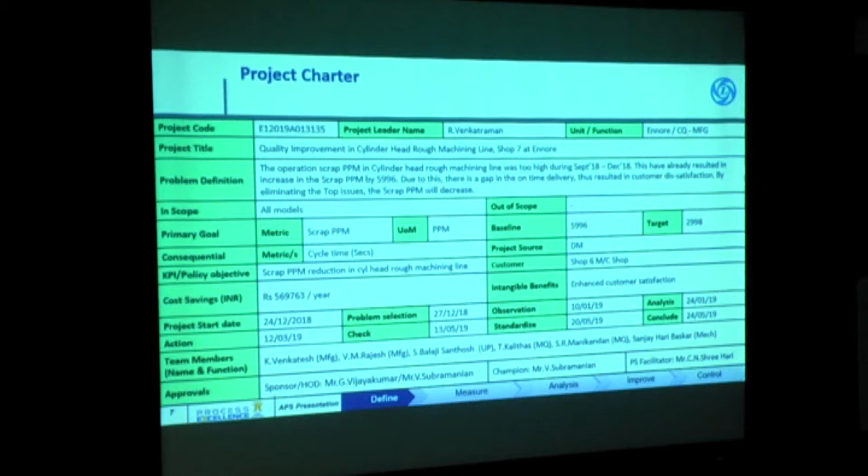So, why this project? During the last financial year, we faced a lot of issues with respect to customer complaints and scrap in the cylinder rough machining line. We got a PPM of around 6,000. This affected our company's vision in terms of delivery. So we needed to reduce the PPM by half, so we took this project.

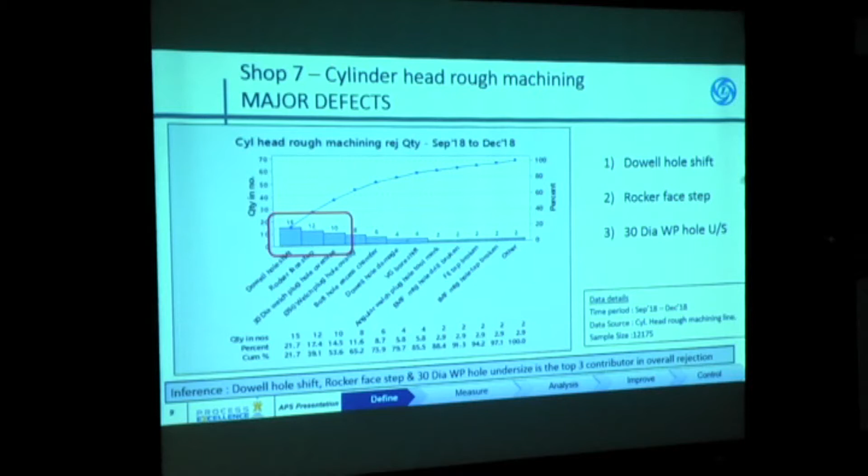In the top three concerns, the first one is dowel hole shift. What is a dowel hole? The dowel hole is used for locating and reference purposes for all machines in the entire machining line. If there is any positional shift in the dowel hole, it will affect all operations in the entire line and lead to bulk rejection at the final stage.

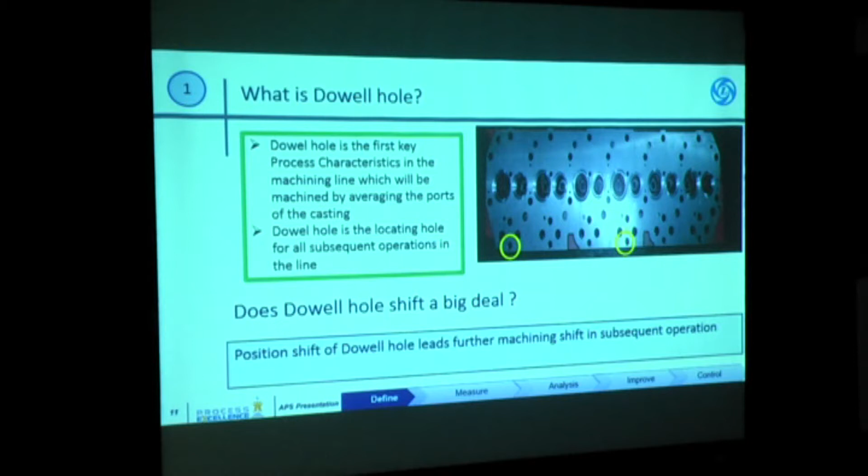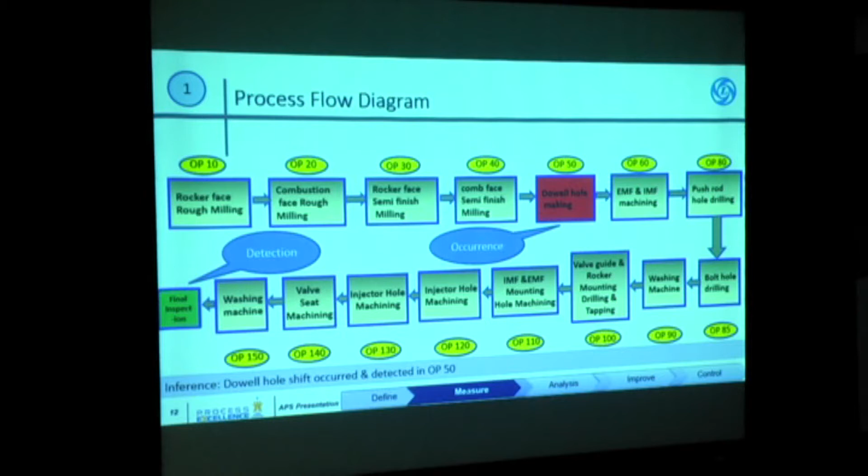This is our process flow diagram. We are doing the dowel hole making process in operation 50. If there are any issues, they are detected only at the final stage when we are looking at other operations. So this is the major concern: before we detect the issue, it always leads to bulk rejection. By fishbone diagram, we identified 7 potential causes and we are validating the same.

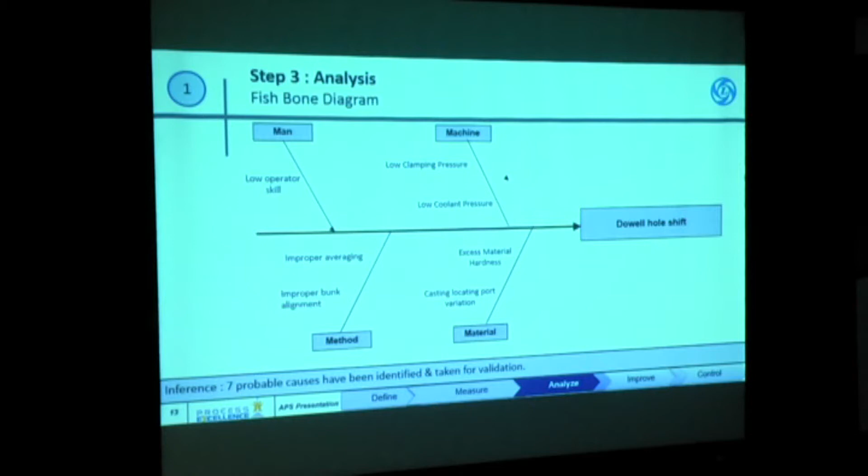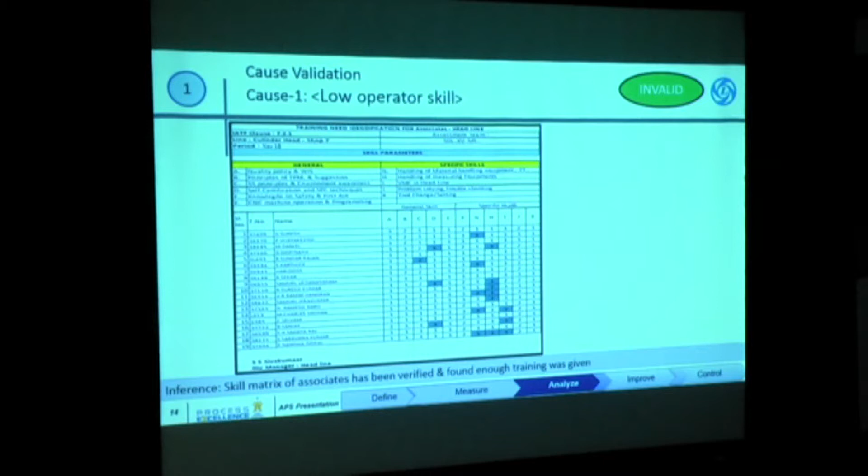Operator skill: when we went to the line, all employees working in the line are well trained and aware of the process, and they are doing their work as per the SOP, so there is no issue. Then we checked the clamping pressure, which may affect the position of the component and lead to positional shift. We took 15 samples and it is as per the spec of 40 bar. Then coolant pressure: we took the same 15 samples and it is as per the control plan, 5 bar.

Then we went to the hardness test of the input component. We checked from various lots and found the values within the spec of 190 to 230 BHN, okay, no issue. Then the locating port distance variation in the casting port, because for the drilling operation the machine takes the first, last and middle port for reference. So if there is any distance variation, it will lead to a positional error.

Then improper averaging. What is averaging? Averaging is the locating and aligning of the component inside the machine. After the dowel hole drilling, all machines take the dowel hole as a reference point, but during the dowel hole drilling, the component orientation is ensured by arresting the component in the X and Y axis by locating the conical port inside the casting port. This is called averaging.

In this averaging, we noticed an issue where the conical port is butting with the combustion face instead of locating inside the port. The machine could not identify whether the averaging is done or not. So it automatically starts the machining, which leads to improper orientation inside the machine and to double hole shift. Of these 7 causes identified, this one is the potential cause.

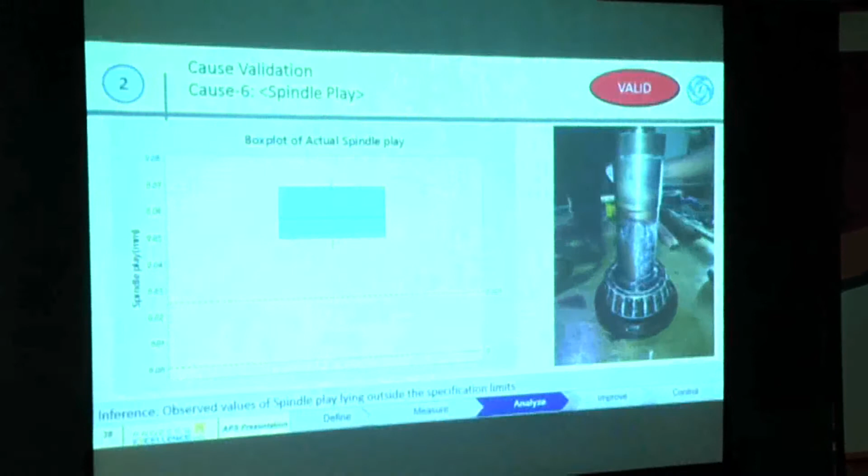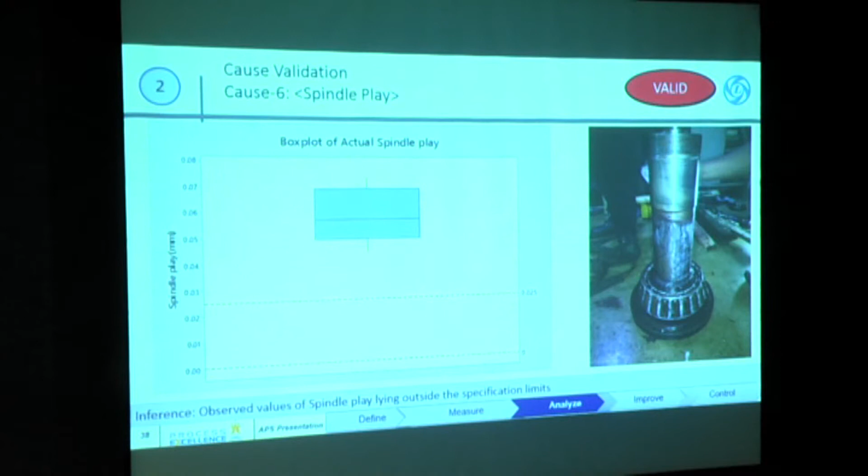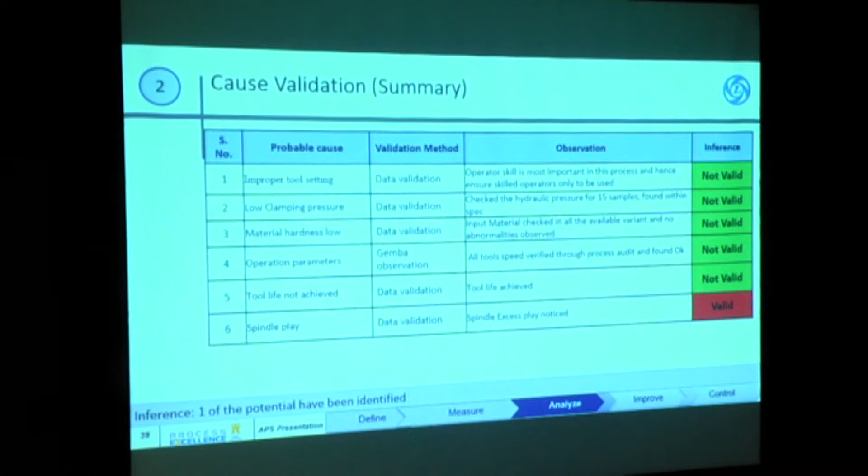Then we came to know while observing that there is a play in the spindle while analyzing the runout of the cutter. The specification has to be within 0 to 25 microns, but it was varying from 50 to 70 microns. So that is how we came to know about the root cause. So we are working on the spindle play.

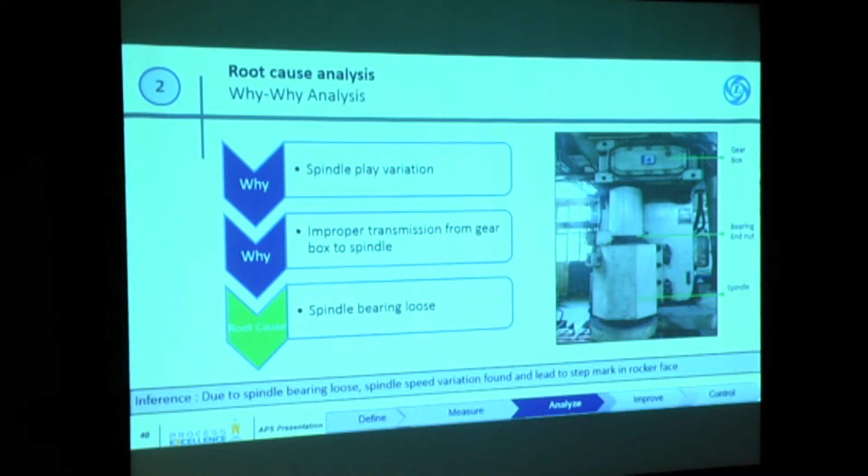So why did that spindle play happen? There is an improper transmission from the gearbox to the spindle. Then we found that there is a spindle bearing loose. We are using a taper roller bearing. It is getting loosened when there is a high load. So we have got some ideas to look into it. What usually used to happen is they would change the taper roller bearing once in 6 to 7 months. So it was actually highly time consuming and cost consuming.

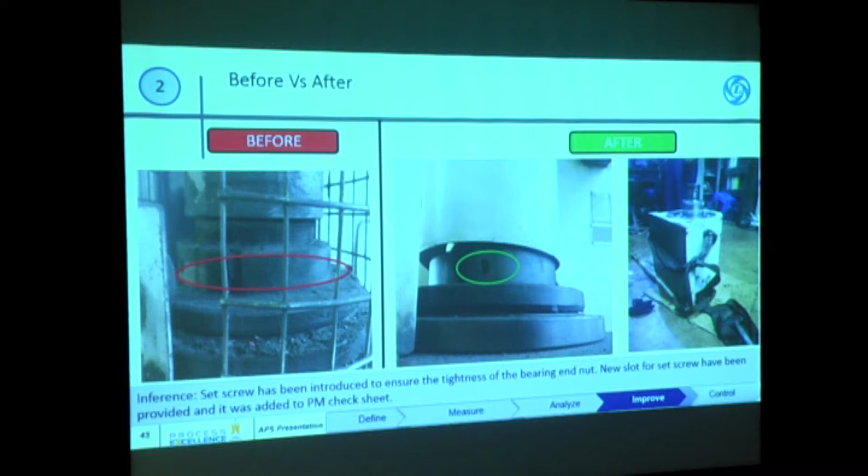So we have given an innovative idea to install a set screw which can eliminate the play of the bearing. Earlier there was no projection and nothing for arresting the spindle play. Then we introduced set screw alignment, and this is what happened while installing. After that no spindle play was observed, and the issue has been eliminated. So this is how it happened.

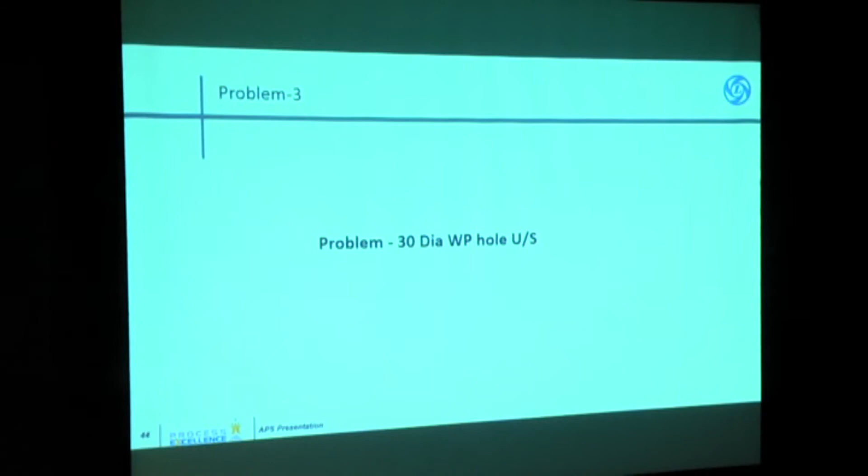Third one was 30 dia welch plug hole undersize. The welch plug hole is the hole which is generated during core removal in the casting process or foundry. When coming to the machine shop, it will come as a cast hole. We machine and finish the hole to 30 with a close tolerance, and we block the hole with a dummy plug for arresting the cooling passage. We are facing undersize in that particular hole.

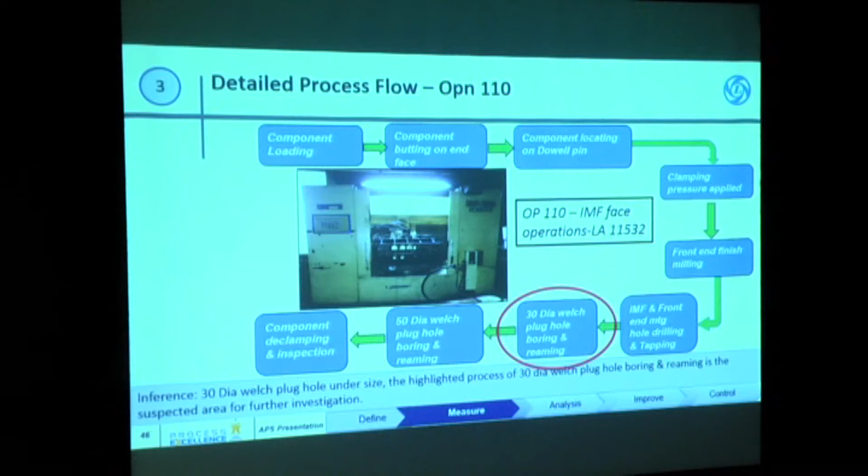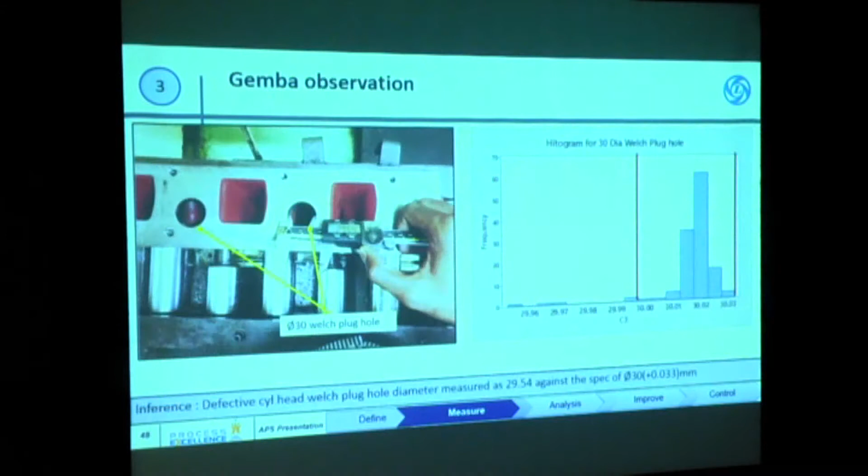The process is carried out in operation 110, and we can identify the same defect in that operation itself. This is the detailed process flow of the operation. We are doing boring and reaming for that particular operation. We checked that the process is followed as per the control plan. There is no deviation. This is the defective photo where the hole diameter is measured at 29.5 mm, against the spec of 30 dia plus 0.033 mm.

Then we take the data and plot it in a normality test, and we found this is non-normal data. So we are going for the goodness of fit test. In that we found this is a fit with a 3-parameter Weibull distribution. In that the PPK is 0.87 only, against the requirement of 1.67 as per our management.

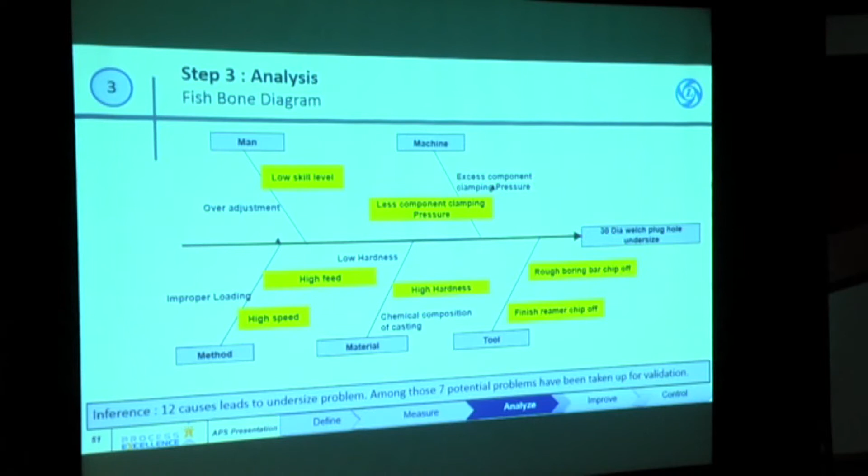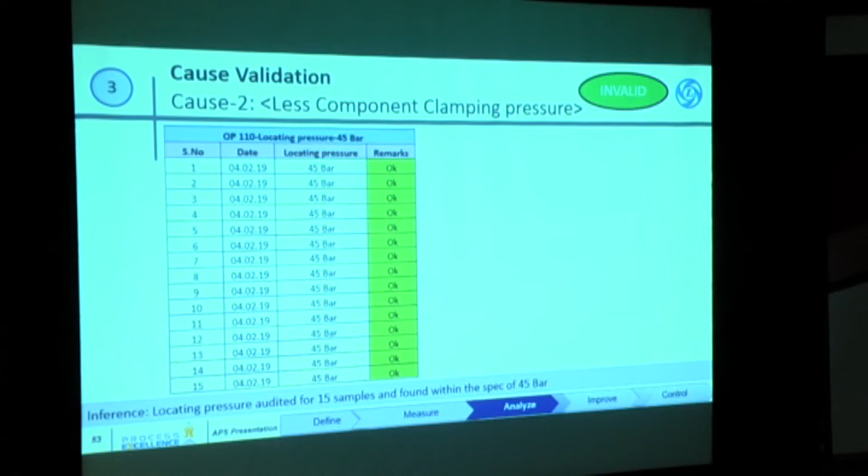In this cause diagram, we have identified 12 possible causes. In that, we have filtered 7 potential causes, and we validated the same. Then we validated all the potential causes: clamping pressure, skill level, hardness. We are checking the speed and feed also. All are followed as per control plan only.

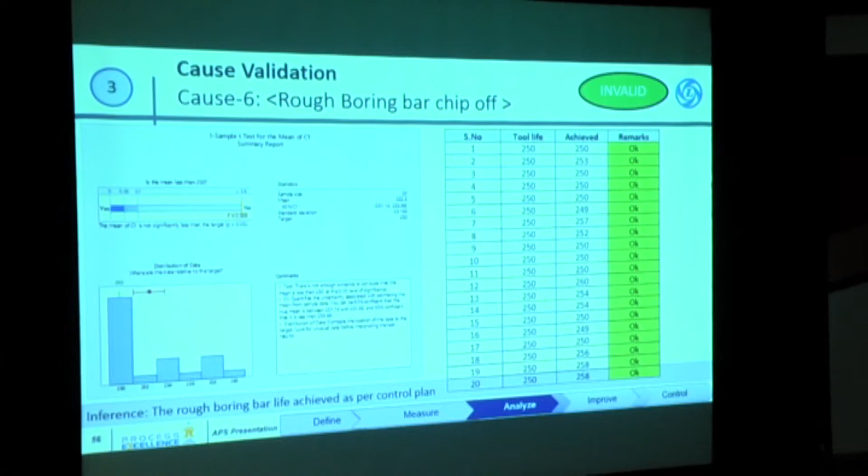For the rough boring bar tool, we conducted a one sample t-test and found the tool life is achieved as per control plan only. But when we go to the finish reamer, we found the tool is broken before the set life in the particular period. So we suspect this is the root cause for this issue.

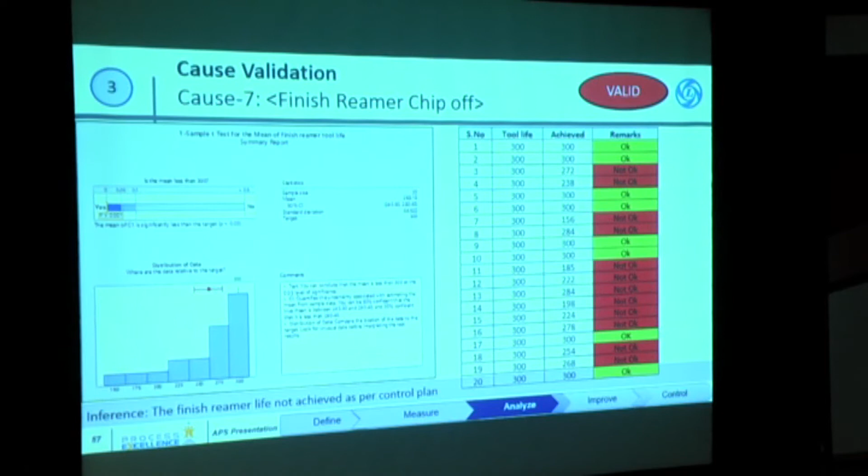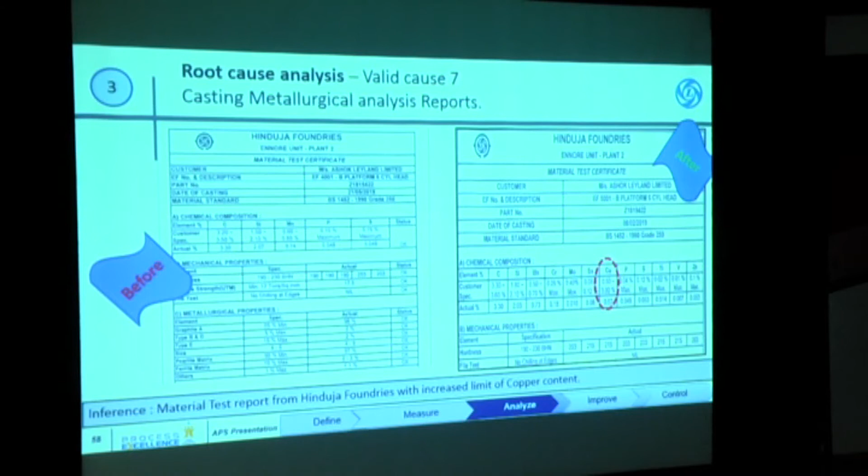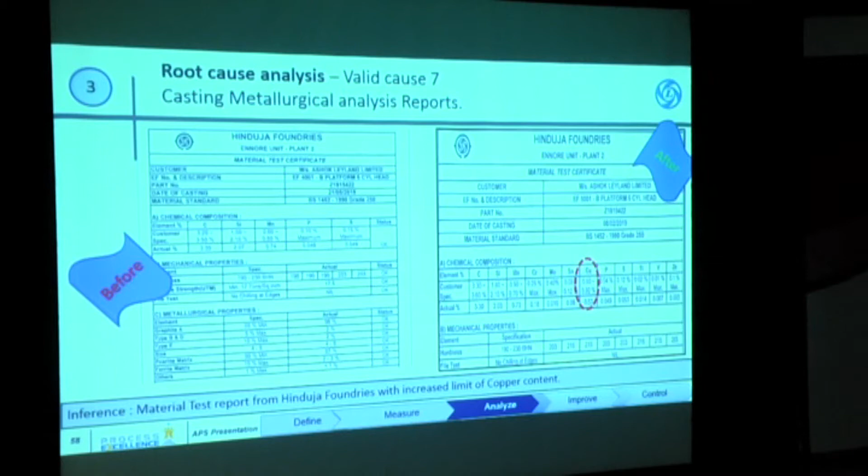Then we thought there would be only 2 changes. One, it has to be with the casting, and the other, it has to be with the tool. In analysis, no tool change has been done, the same tool is being used, so what happened with the casting? So we spoke with the foundries and came to know that copper content has been increased from lower spec to higher spec, because since we are transferring to BS6, in BS6 we are going from 0.6 to 1, so they have maintained the spec from 0.2 to 0.5. So that was the thing which we suspected.